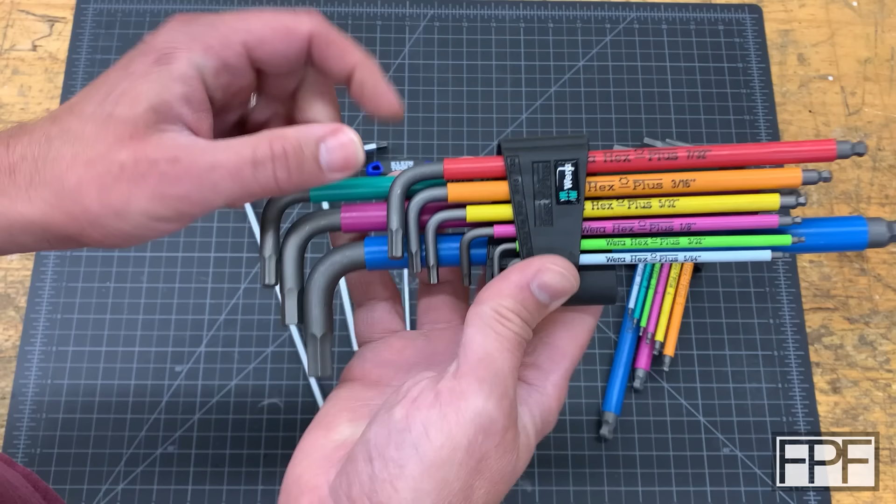I've had these two nice sets of the Wera hex wrenches for a while. These are nice, they have a ball end on one side and just a straight one on the short side. These are my go-to sets if I'm walking somewhere to use a hex wrench, in other words, I'm not standing right here in my shop. Or even if I'm going over to the car or something I'm working on and I don't know what size it is, I'll grab these because it's nice to have every size.

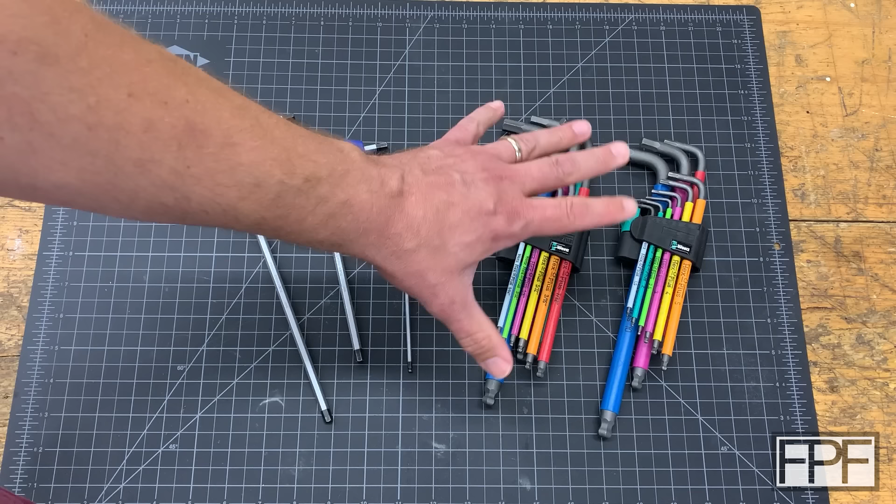The downside to these are they are a bit tricky to get in and out. It's nice that they stay all organized and together, but there's some effort required to pull this out, and then when you're done with it, you've got to slide it back in. If you just need a hex wrench for something quickly, you end up spending a fair amount of time just getting the wrenches out and putting them back in. But these are still my favorite sets if I just need to have the whole set with me, or if I'm going someplace to work on something, maybe my barn, whatever, I take these.

But I increasingly find myself really, really liking these Klein T-handles. If I know what size I need, I'm working on something, maybe taking something apart, I know I need, say, the 6 and the 3, and just have these handy because I can just pick them up and use them. So back in March, I ordered full sets of these Klein ones in the 6-inch.

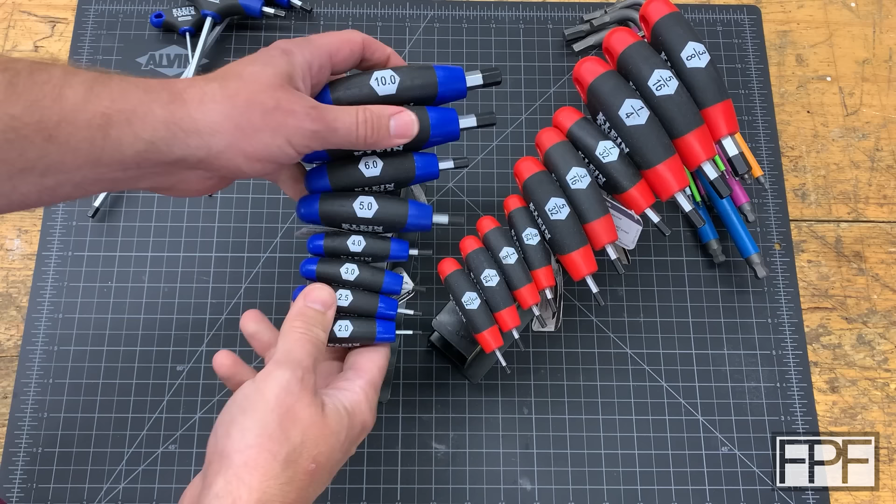Let me grab those. So the Imperial set, or SAE, whatever you want to call it, this came right away, within like a week after I ordered it. And the metric one, even though I ordered these in March, this one finally just came this week. It actually came while we were gone, which was a nice surprise when I got back because I really wasn't sure if I was even going to get it anymore. It's nice to have all the sizes, but you'll notice I didn't even take the labels off the Imperial ones, because I always intended to make my own holders for these.

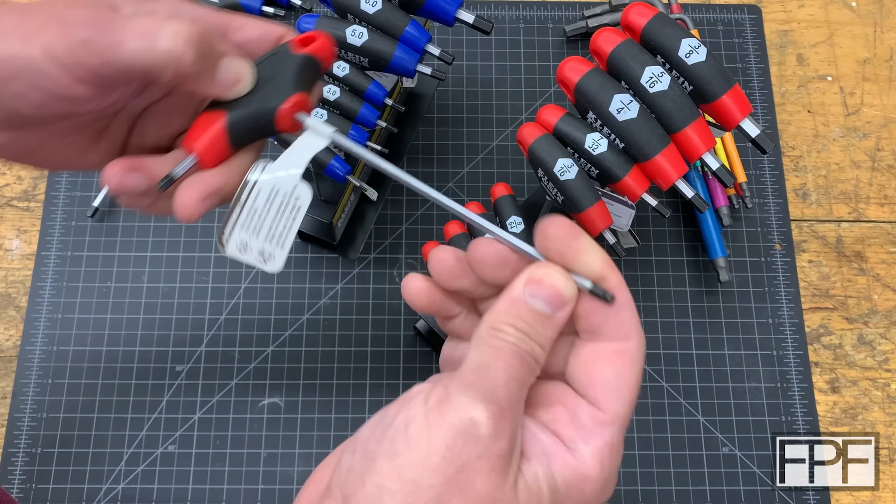The T-handle wrenches themselves are really, really nice. They're a nice hard material, they don't seem to be rounding over or wearing anywhere. They're really comfortable to hold, but the rack or holder they come in is crap. I can't think of another way to say it. And I guess this is how they all come, it's not like Klein has done something here that's just terrible. I know this is a standard metal rack that T-handle wrenches like this have come in for, I don't know, probably 100 years.

But what I don't like about it is if you're just working quickly, let's say I need the 5/32, I grab this one and go to put it back. Well, now I have to be perfectly lined up with that hole. And it gets worse because I have to be perfectly lined up with this lower hole as well. So you really have to slow down, line it up, make sure you're perfectly straight up and down, drop it through the second hole, and then you're in. So if you're just working quickly, you want to grab a wrench, up, 5/32, nope, it's the 3/16, alright let me get this one back in the 3. I'm exaggerating a bit, but you can't be quick, and that's the whole point.

If I wanted to take the time to get the wrenches in and out, I'd probably just use the Wera set, but I'm addicted to doing things quickly. I like working on things. I don't like the time it takes to fight with getting tools in and out of things. I guess it's hard to explain. I like moving quickly in the shop, and it's hard to move quickly in the shop with this style of holder. So ever since I ordered these, I knew I wanted to design my own holder for them, and I also have a specific spot that I want to try and fit them into.

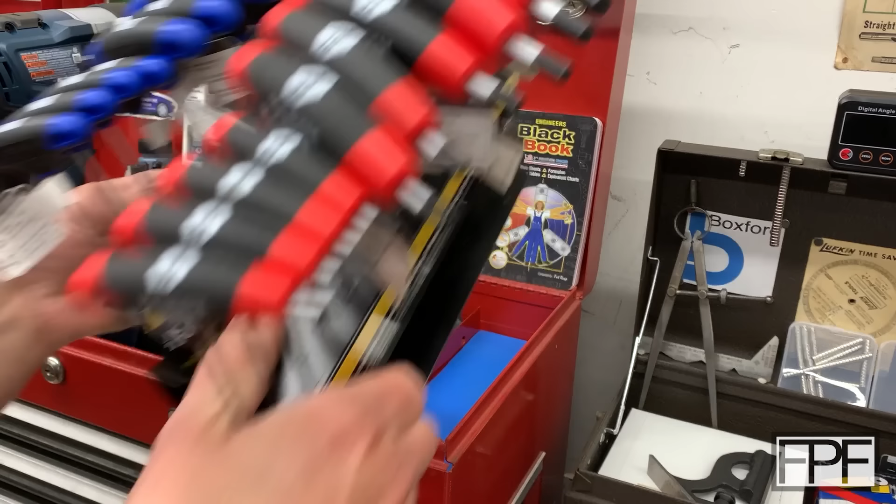Okay, so if I try and set these in here, you can see it actually kind of fits even just like that, but they're not going to stay. Like this one's setting up on top of the other one, and I really can't see the ones at the back. This is up quite high. I'm 6 foot tall, and this is about my eye level right here. So I can't really see these that great.

What I'm thinking is I'd like to have them up like this, so up at a compound angle, which is going to make this very difficult, and why I'm not sure that we're actually going to finish this today. But I do want to at least get this started. So I'm holding them up, maybe that's somewhere between 35 and 50 degrees. I'm also turning them outward, away from each other. And I'm moving the front sort of closer together. If I could magically hold them in that position, somewhere around there. They also kind of key together there, if you notice, rather than trying to line them up like that. That's not bad either. But then we're too wide, I think.

I have to work within just this width as well, because there's a steel divider here in the toolbox. So I'm thinking something like that, or like that. All right, so the obvious thing that's going to be really tricky here is measuring all those angles. And I don't think I'm going to be able to get them perfectly, because I'd have to hold this and then magically have room to get in there to measure everything while I'm doing it. So I think I'm going to try and take one element at a time. I think I'm going to maybe get the rise like this angle. Actually, even steeper. Yeah, even that's kind of nice.

It's also hard to see that hole when they're all in place here, and it's going to be even harder to see when we've got two sets in here. So we'll definitely need to make that like a funnel, so as long as we're close, it kind of forces it in, and then we won't have to worry about the second hole because ours is not going to be bent sheet metal.

It'll be solid material all the way down the sides of the hole to guide those in. So, all right, that's what I'm going to do. I'm going to take this one up to my desk, measure it out. We'll model this one, print it out, and just see how things fit.

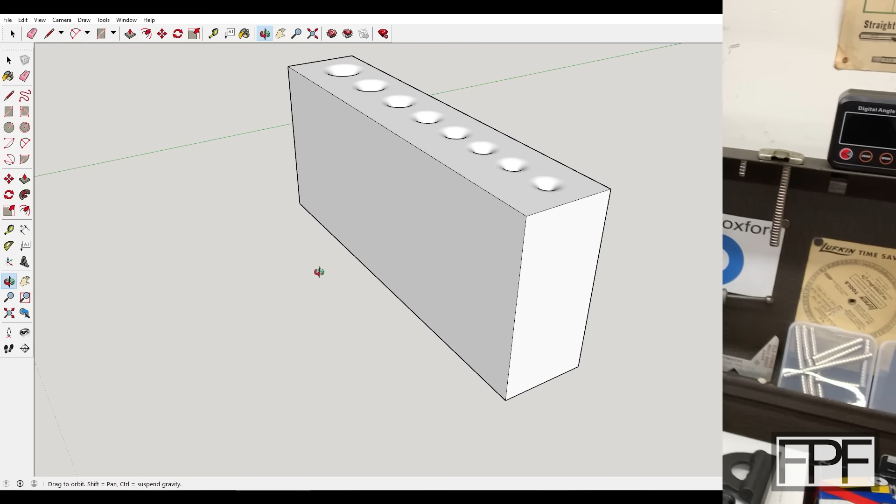All right, and here is what I came up with, just basically modeling what we already had in the existing stand, duplicating it as a starting point just to figure out what our bore sizes need to be to get the same sort of slip fit that the steel part has, and then also testing out the sort of funnel top here, which is a 5mm roundover. Probably the easiest way to see what's going on is just to whack the side.

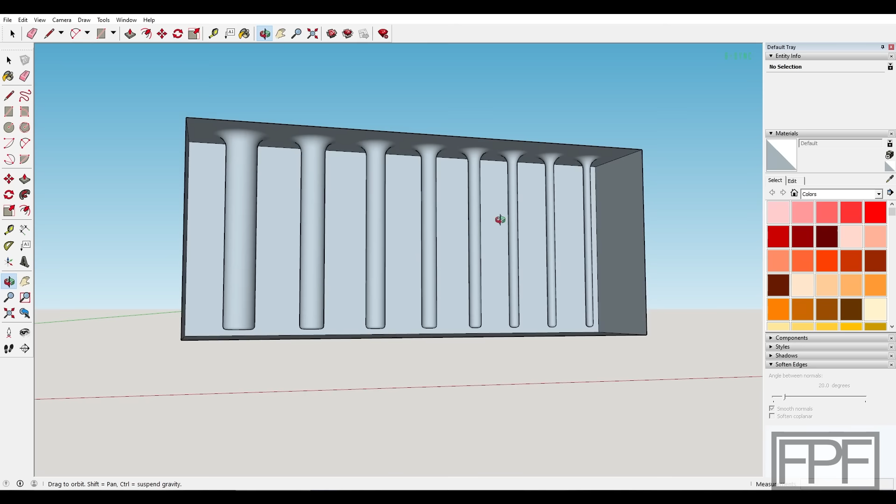You can see I've got the bores. Basically, I just duplicated the overall length of the current steel holder, which was that top plate, and then a second plate that each one of these drops through, and then the bottom plate they just sit against. So overall this is a little bit taller because the bottom of these bores essentially represents what was the wrench hitting against that bottom plate.

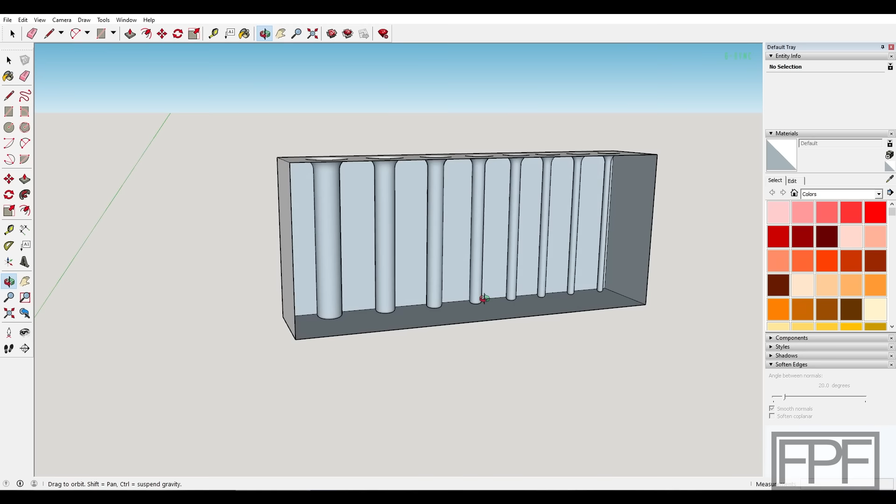But yeah, I think it's good to stop here. It's really tempting to keep going, but it's good to stop here, print this out, and just see how everything fits before we do any more modeling. So that's exactly what I'm gonna do. I'm gonna slice this up, get it printed out, and I will bring you guys back.

All right, our test print finished, and it looks really good. Looking at the rounded top here, I'm not sure if we went big enough. Now, let's try it.

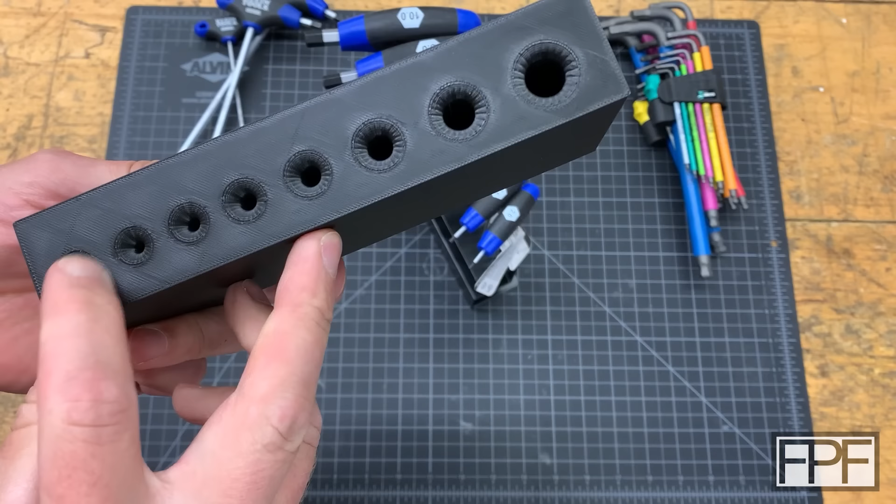Yeah, I mean, it's still, you don't have to be dead on. As long as you're close to that funnel, it drops it in, but you gotta be within, well, I think we did a 5mm roundover, so I guess you probably gotta be within about 4mm of the edge of the hole, which isn't bad. Definitely better than it was. Yeah, I can drop these in a lot faster with this guy, and it looks like our fit is right.

They all seem to be sitting in there the same way they were before. I am noticing, why does this guy look lower? Pretty sure I have all these the same depth. I probably should have paid more attention. Let's put him back in this guy. Yeah, it's actually lower here too, so we didn't screw that up.

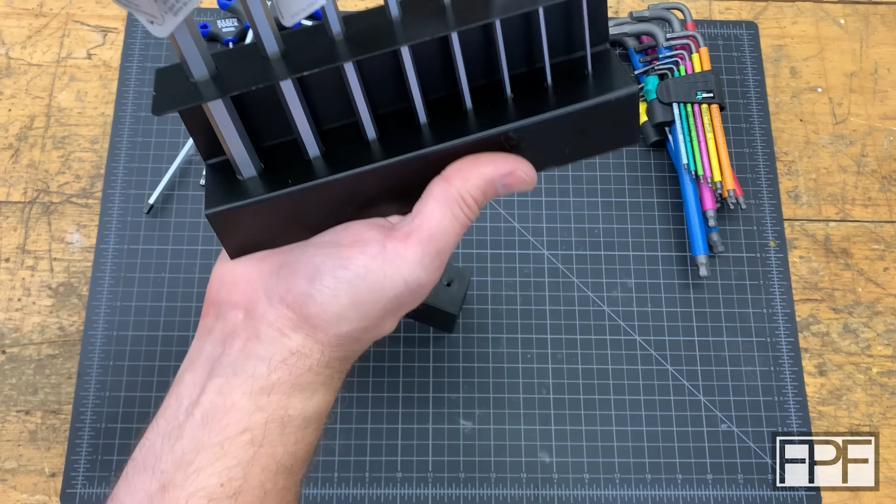So the original designer of the holder here is working with the limitation of just having one flat surface. We inadvertently duplicated that sort of, not error, but limitation. We don't have that same limitation, so we could actually raise that bore up a little bit because there's no reason for that 4mm in this case to sit lower than the other ones. We can raise that up. Yeah, I'll measure that, we'll raise that up. But the other ones all look good.

So seeing this done, I think what I'm gonna do is model the SAE or the Imperial one the same way as this. I'm feeling like it's going to be too difficult to try and model that crazy shape with all those angles on its own. It might be easier to model each of these first, then position these in all the compound angles that I think we need to do to get that where I want it, and then just sort of fill in the blanks with geometry.

All right, guys, welcome back to my design space. So it has been a busy morning. I think where we left off was I said I was going to draw the Imperial one or the SAE one the same as we did the metric one. I went ahead and did that. We don't really have time to print this one out and see how everything fits. I'm not really worried anyway because I just pretty much repeated the same design elements from this one.

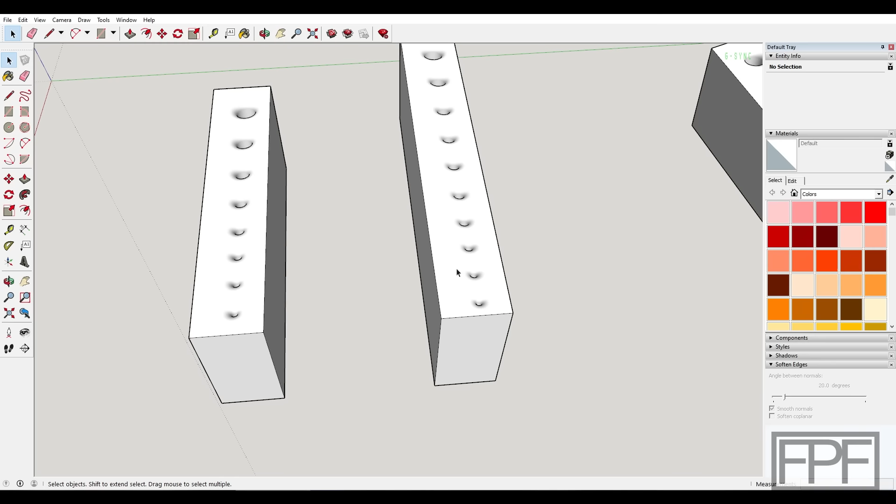So I measured the bore size in the stamped steel one and then just added 0.2 to each dimension. That got us to good fits on the metric one, so that should be fine. And then I went into trying to figure out how to get these to be all of the compound angles that we need to make this work, and then also within the constraint of that space.

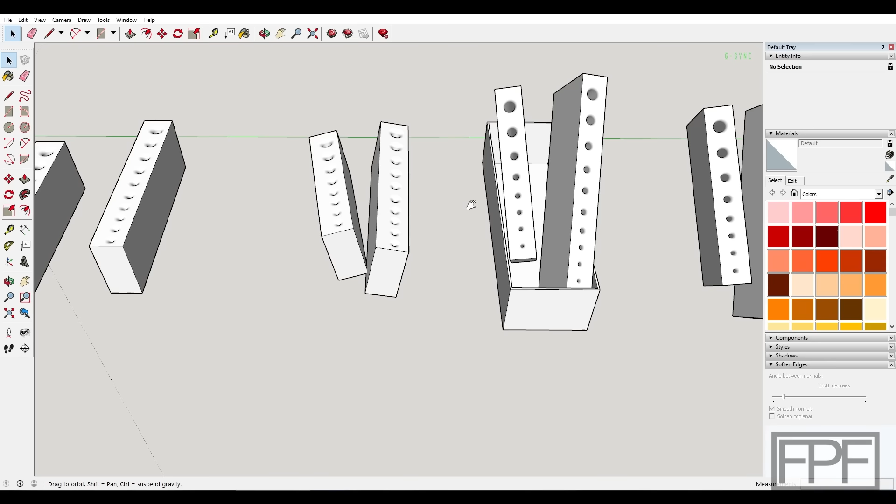So here you can see I started just trying to take some measurements and angling these. I quickly realized I was getting out of the dimensions of that space, so I went and modeled a box that represents that slot in the side of the toolbox that these are going to sit into. I messed with the angles until everything was clear of the sides and also pretty close to the angles I measured to get everything to fit.

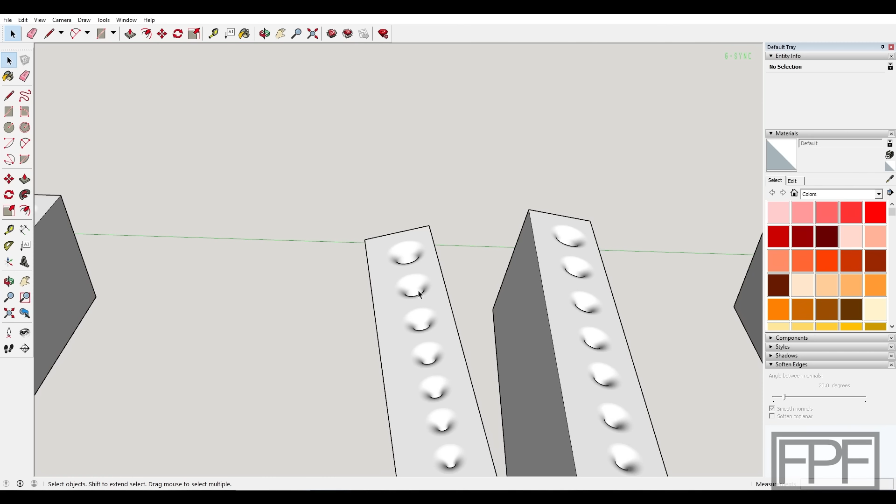Once I got to that point, I shaved a little off the sides. So the way I modeled these, if you look at these ones here, you can see that the bore isn't centered. I modeled these to match the steel ones, and for whatever reason they were off center in the steel ones, probably for better balance if I had to guess.

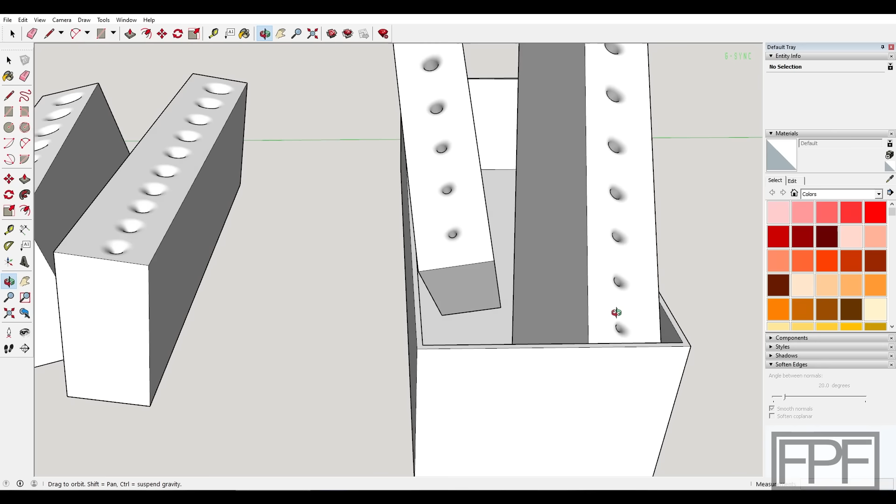We don't have that constraint, so I shortened it up so that the bores are centered within the parts. The reason I did that is because we need all the space we can get, particularly from the base, to angle these guys both outward at the top and to spread them apart at the back.

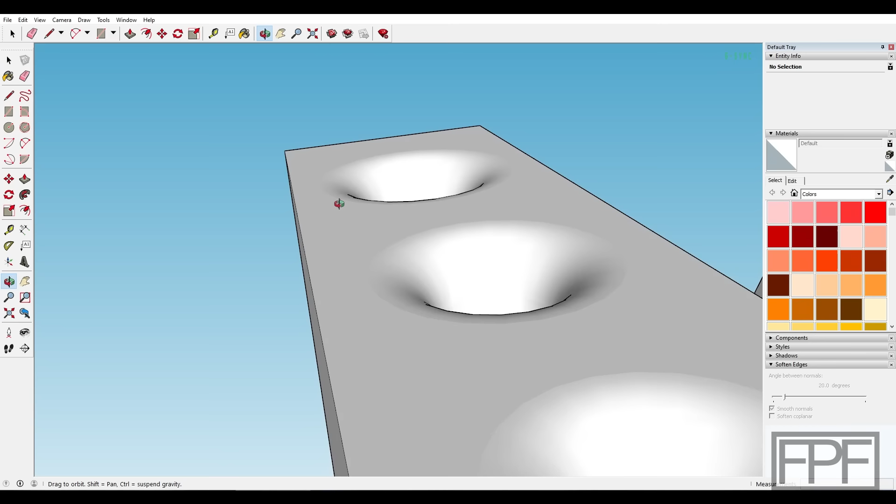I really need every little bit of space. I think I only have 1.5 millimeters here and 1.5 millimeters over here. We could shrink that down a little bit further, but we actually do get into those 5mm roundovers pretty quick, particularly up here at the top. I think there's only either 2 or 3 millimeters between the edge of our roundover and the edge.

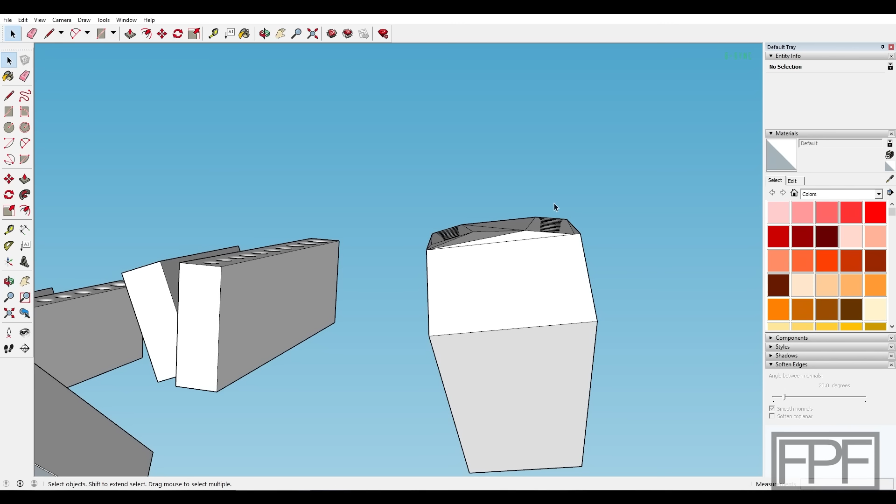And then from there, I duplicated these again, and you can see the final one here. I just started connecting the dots. There's probably a better way to do this, but I'm running out of time, and I just want to get to the point where I can print this out and test fit everything to see if it lines up where I want. There's about, I think, a 21 degree angle between these, but it's connected by a straight section.

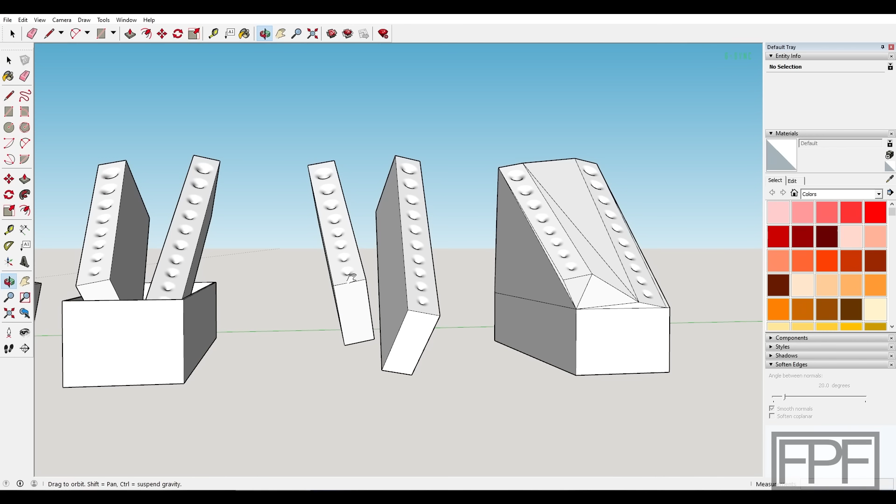These ended up being angled upwards. I think I did 41 degrees, and then I spread apart the back. There's a whole lot of guessing here, and that's why I want to get this one printed out and see where we're at. And when I say connecting the dots, I mean I literally just started drawing geometry between the different pieces here so that we get the faces that we need for this to print.

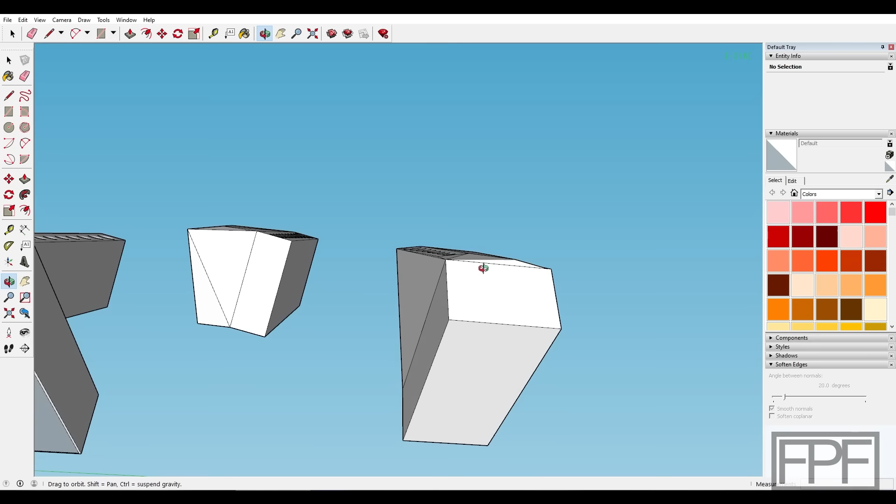And then I duplicated the box as well, so that the bottom portion of this that's going to fit inside this is a rectangle. This does splay outwards at the top, and that's just fine. We're not constrained with the width on the print. We're just constrained with the width down here at the bottom where it needs to fit into the toolbox.

All right, let's pull this into the slicer and see how much this is going to hurt. This part ended up being, once I started connecting all the dots here, this thing's really starting to look pretty big. So let's pull this into Bambu Studio and see what it says. All right, good news, it fits on the bed just fine. Bad news, I grossly underestimated how long this thing is going to take to print.

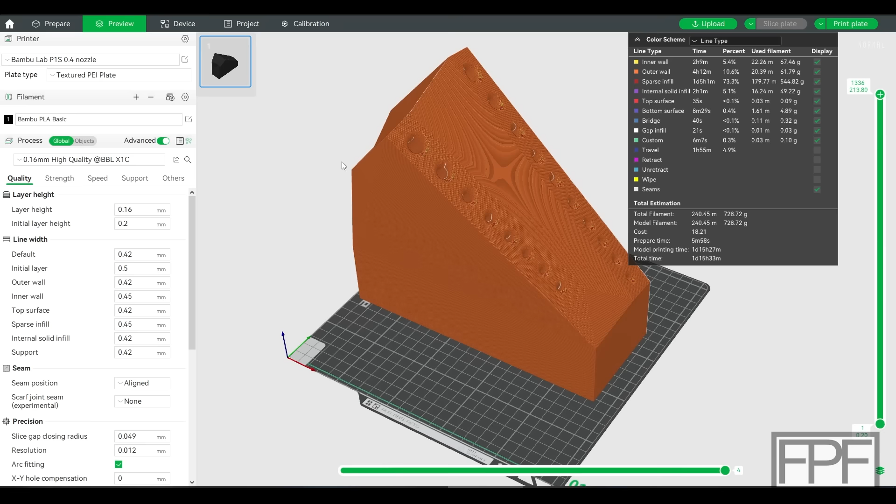So I did the original test, just the metric side at a 0.16 millimeter layer height, which is what I would ultimately like this part to be. But you can see that this thing is going to take 1 day, 15 hours, and 27 minutes to print out. So that is not going to work.

Let me see how fast I can make this happen on my X1C with the 0.6 nozzle at a much taller layer height. All right, so I switched over to my X1 Carbon with a 0.6 nozzle, and I upped the layer height to 0.42 millimeters, almost half a millimeter per layer. That is the highest setting I can choose from the default options here, and I don't think I'd want to go any bigger than that anyway. I mean, that's almost half a millimeter per layer.

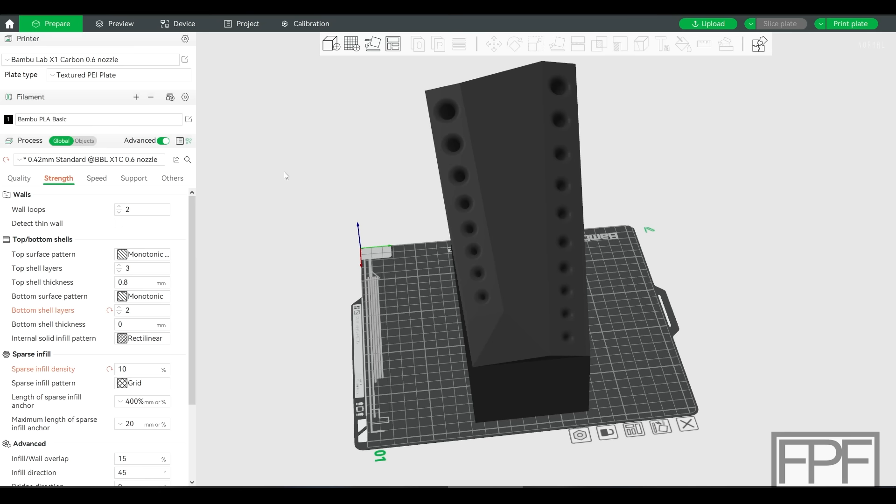This thing's probably going to be pretty ugly, but that's okay. If it gets us to being able to actually test where we're at so far, it's job done. I also had to lower the bottom shell layers from 3 down to 2, and the top shell layers I'm going to leave at 3, but I did knock the infill down to 10%.

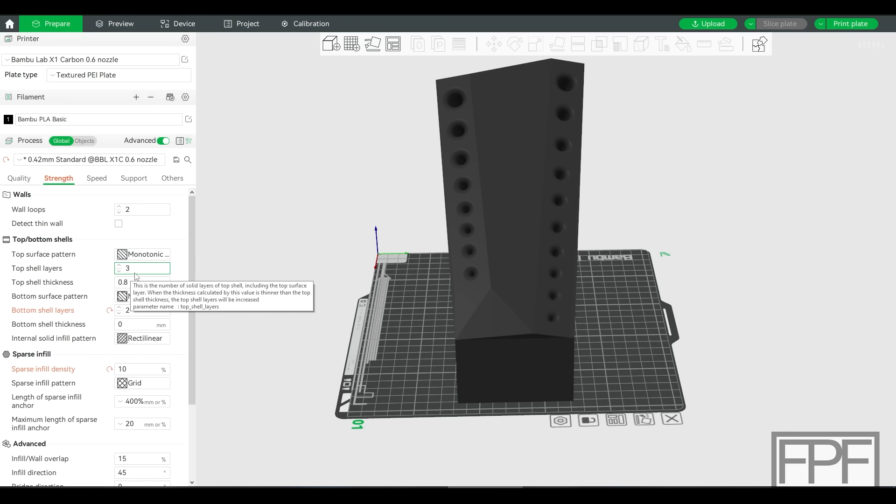So I have a feeling that 3 top shell layers is probably not going to be enough. We're probably going to have some drooping. But again, that's okay. As long as we're able to test the position of everything with this and just see how all of the different locations relate to each other, and if it fits in the toolbox, it's job done for this.

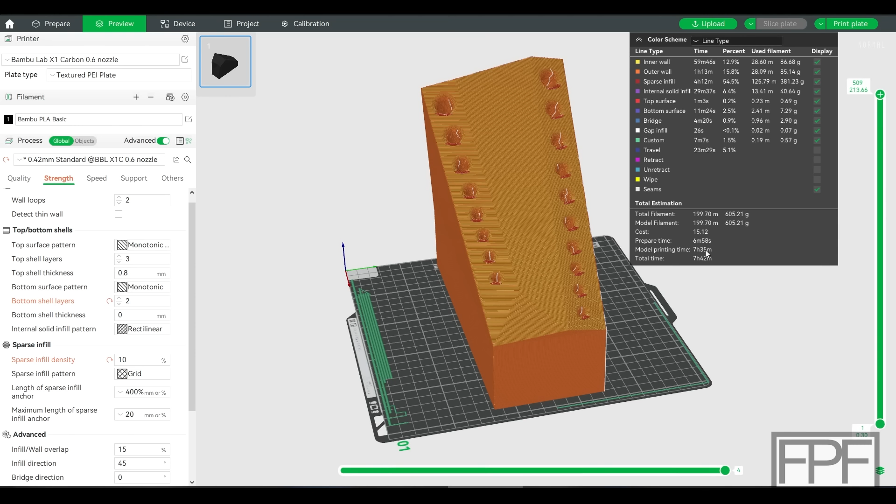This is just going to be a draft part. The good news is this is down now to a 7-hour and 35-minute print, which it's a little after noon right now. So yeah, this video is probably going to be getting out pretty late, but I can stomach that. If this thing gets done inside of 8 hours, I think there'll still be some time to test this part, shoot some more video, and get things edited. So, all right, I'm going to hit print, and I will bring you guys back.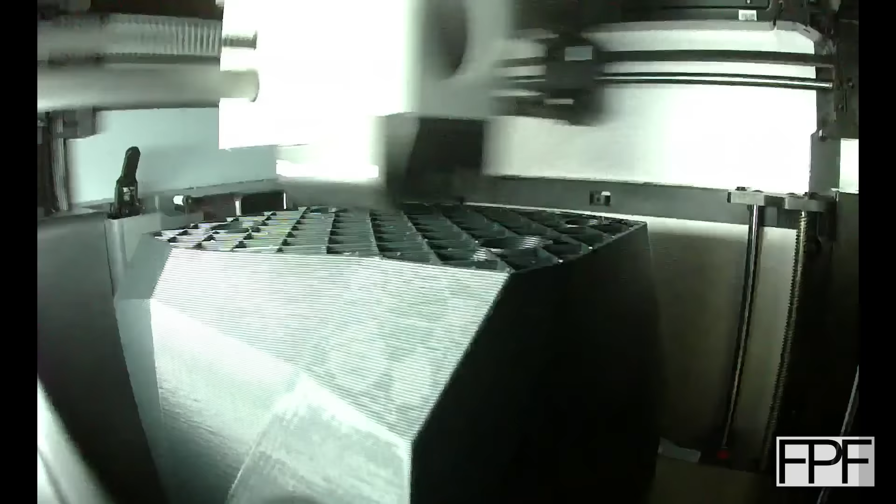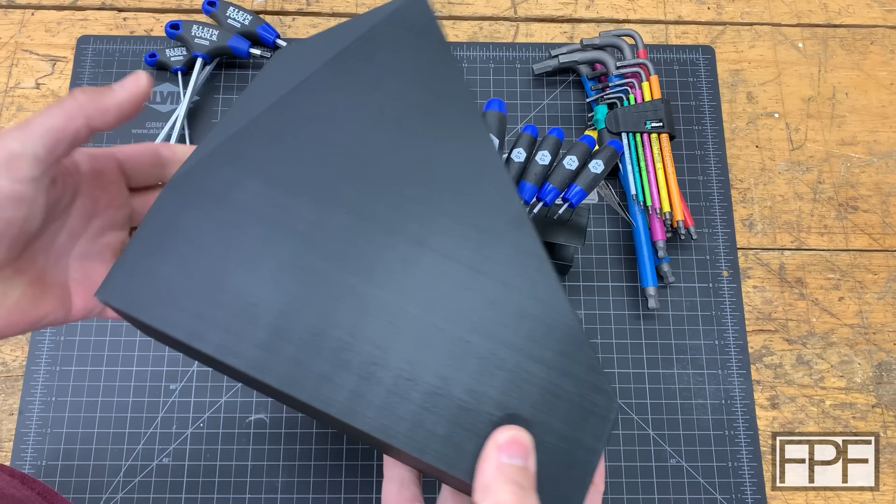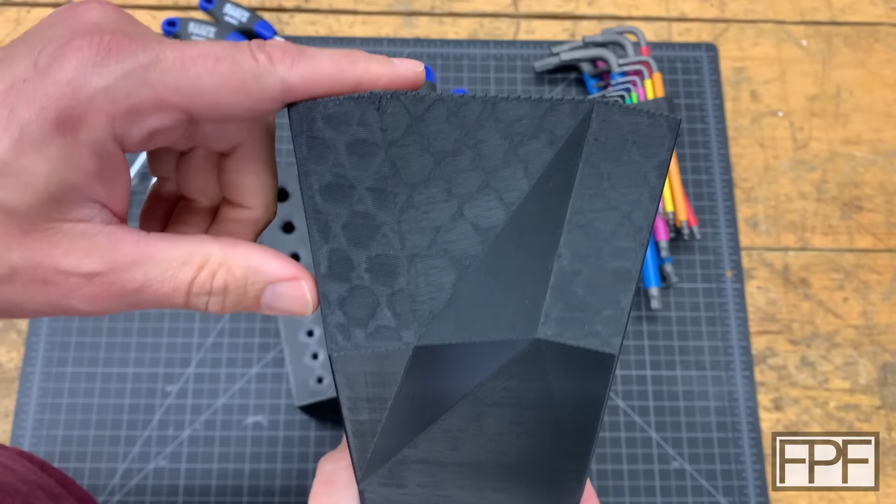All right, well, good news, it's still Friday and this finished. Bad news, in the 6+ years I've been 3D printing stuff, this has got to be the worst quality print that I have ever made. But it did finish. Actually, looking at the back of it, it looks kind of neat. The layers are almost half a millimeter thick, I think we did 0.42, if I recall, with 2 top layers. So we can see the infill through it, but in kind of a mesmerizing, consistent way.

The problem is the holes. As you can imagine, the layer height is so coarse that the larger ones might be okay, but I'll be really surprised if we can actually get the hex wrenches into these smaller holes. Checking on this thing while it was printing, these bores looked an absolute mess. Some of them looked like they were done with a 3D pen, freehand, rather than with a 3D printer. So, all right, let's try it.

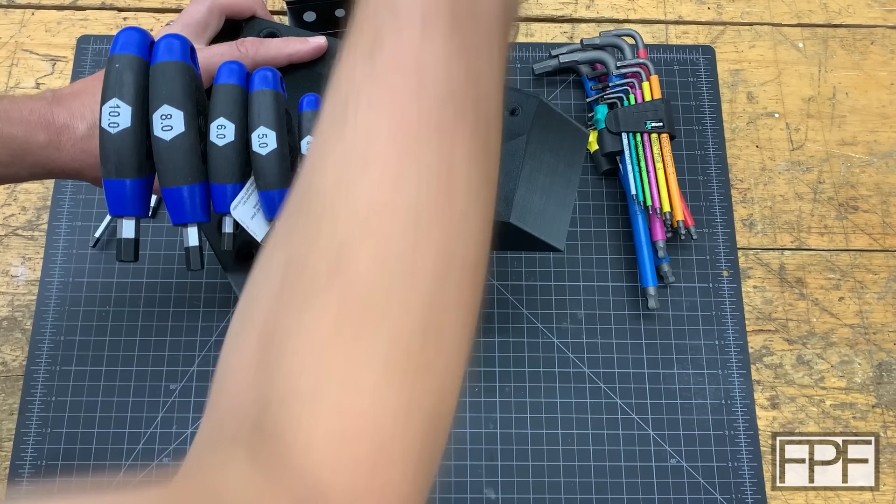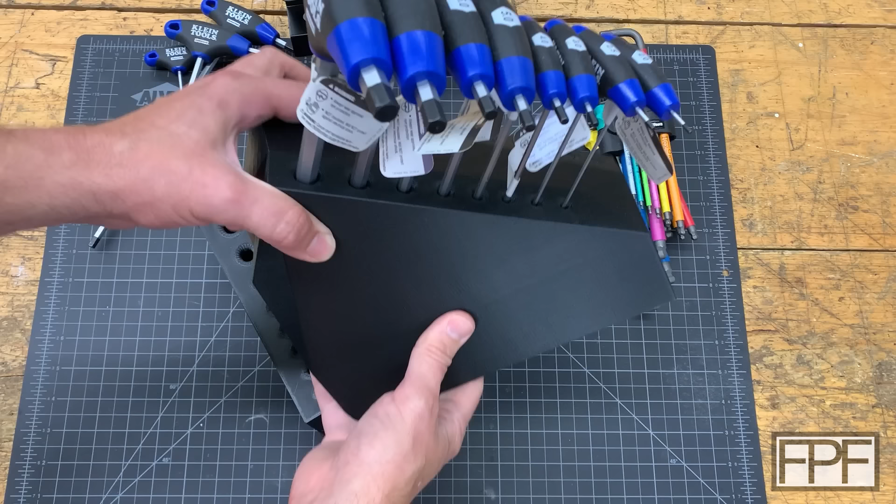Okay, the metric ones all actually fit in. Some of them are really tight. The 5, for whatever reason, is really tight, so is the 4. The 3, 2.5, and 2 are actually not a bad fit. And the 8's tight too, which doesn't make a lot of sense. The 10's got plenty of space. I think our layers were just so thick it was just sort of luck of the draw as to whether the printer managed to do that whole bore without having a layer that's sort of laid over on top of another one.

Let's try the other ones. Okay, this one, maybe? No, that's going to get stuck in there. That one does not fit. I don't think this one does either. Oh, it's going. Add the 8th one in. There we go. Okay, so below 5/32, they're pretty much just all jammed in there.

All right, same kind of deal. Some of these are really tight, like the 1/4 is really tight. As you can see, the 7/64 is pretty much just almost hammered in, and this one I couldn't get to go in at all. You know what? Let me actually try to drill that out. It's plausible, right? Of course, would help if we actually had the right one.

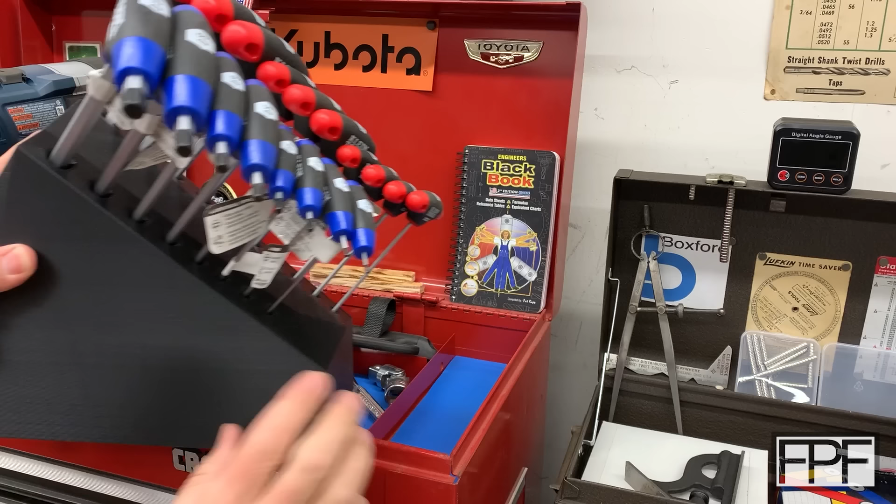You know what, let's go over to the toolbox and see how it looks in there. All right, let's see if I got the dimensions right here for this to drop in. Yep, it's actually pretty much perfect left to right. Back and forth, the reason the base is smaller than the length of this compartment was just simply so this would fit on the bed of my Bambu printer rather than doing it on the Neptune 4 Max. The Bambu's a lot faster. We would have been well into tomorrow if I printed this on the Neptune 4 Max, even without making it longer.

But I kind of like that it slides back and forth. In fact, I was originally thinking all the way up here at the front, but now that I can kind of play with it, I kind of like it pushed back. And that gives me the option of maybe having something else up front here too. Or we could just make a spacer up here as well.

I do want them closer together. I don't like having the gap there. Although, I guess if I'm going to pull these out, I'm probably going to do it from this end, thinking if I bring them together, then I lose the option to reach in here with my index finger from this side to grab them out. Yeah, I think it makes more sense to just grab by the hex. Right now they're all too snug in here because these holes closed up.

I'm on the fence as to whether we put numbers on these. Obviously, they're marked here. We could see that really nice right now. Let me actually bring the camera over to the center. All right, from this angle, I think you guys can see what I'm talking about. So we've got this nice flat part down the middle. Now that's going to get cut in half when I bring these closer together, but there will still be a surface there that we could put markings on if we wanted to.

Should we label these, or do we just leave it blank? I'm on the fence. If we only have one out, clearly we know where it goes back, right? I'm not going to look at those labels. But if we've got a bunch out, it might be nice to have them marked. Now, we're going to lose visibility because these are going to get closer together at the top, so we might not even be able to see the markings. But we will see the markings if a bunch of them are out, because it's the wrenches themselves that would block our visibility down into that middle.

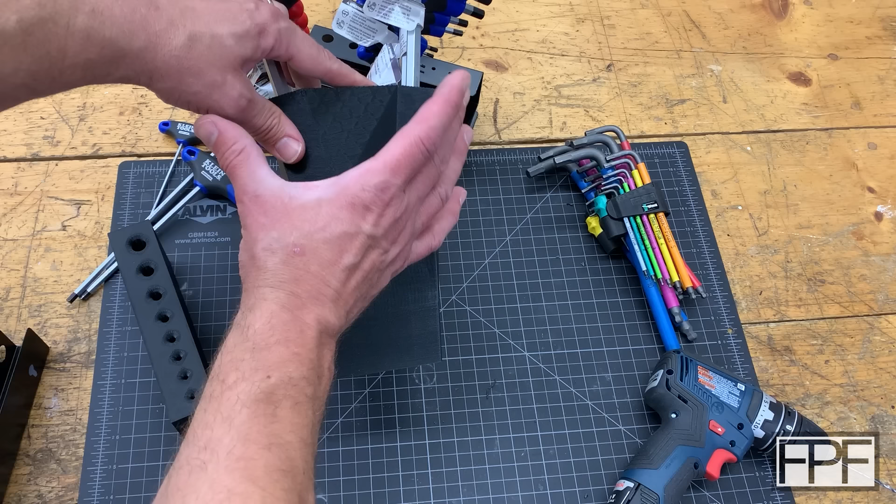I'm thinking that this is probably going to be a nice to have for anybody that has a set of these Klein T-handles. I might do another version for you guys that has a wider base. My base is the exact width, the maximum width that I could fit in that space, and then it gets wider as it goes to the top. If you don't have that constraint of trying to fit this in the top of a narrow section of a toolbox, I think I'd make the base bigger.

But yeah, I could even see just grabbing this whole thing out of the toolbox and popping it on my tool cart, or even bringing it down here to the workbench to use just like this, because they're all right in front of you, lined up.

All right guys, as I look at the clock, it is 10 minutes after 10 p.m. Eastern time here, and I still have to get all this footage off the camera and actually edit it. So we're not going to be able to do any more iterating on this today, but let me know down in the comments. Number one, if you guys think I should label the center section, and number two, if there's anything else you would do to this that I'm just not thinking of right now.